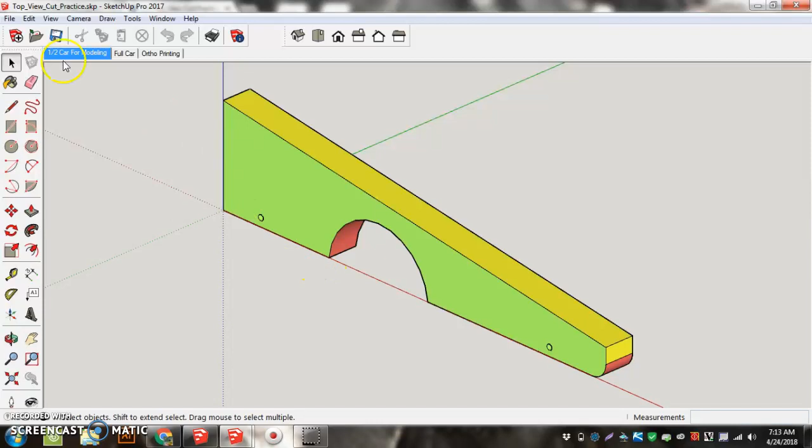So this file here is the top view cut practice file. I downloaded it from Schoology, and we want to do a top view cut practice on this one rather than on our main one, just because top view cuts are a little bit more difficult than what we've been doing so far. So we still have all the same stuff on the top here. Half car for modeling is the main one that we want to look at.

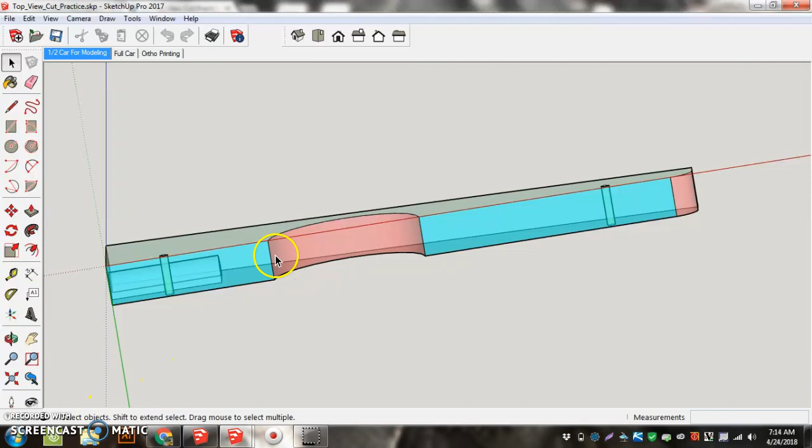And I'm looking at the bottom of my car here. So again, on top view, you can't touch the cartridge hole, you can't touch the axle holes on the outside of the car. You can, however, cut on the inside. So if this is how you'd make a forked car, this is how you're going to cut the side of the car in, this is how you're going to round the front of the car off. So I'll do a little bit of each of that to show you and explain what's going on there. So the first thing we have to do is edit this component.

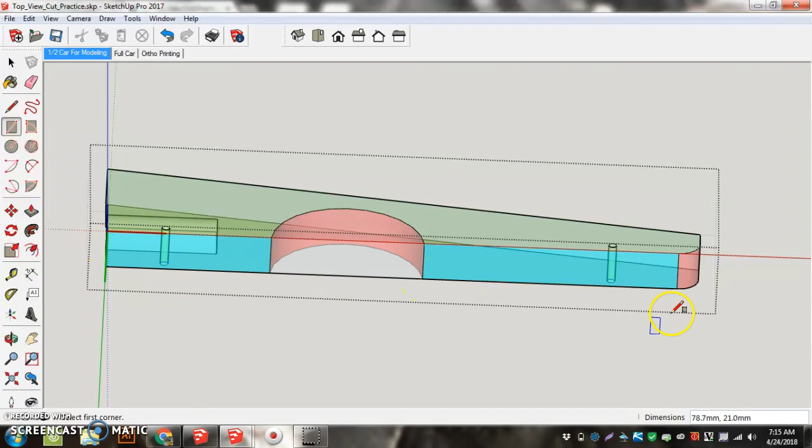So we're going to right click and go edit component. And we got the gray box, so we're working with the component. Now when I'm working on the bottom of a car, I need it to be flat. So to get it back to flat, we have to create a surface here. So I'm going to take the rectangle tool and go across this bottom surface. I can go right over this gap, or I could do the whole surface. Either way works. But now I have that flat.

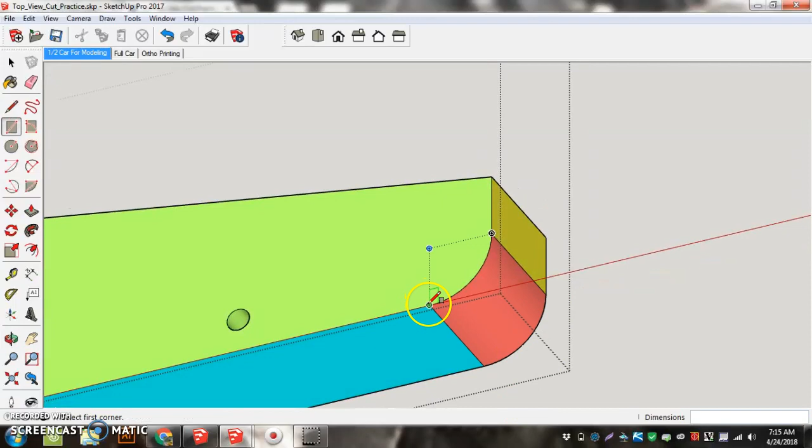I'm going to change that to view and face style and uncheck X-ray. So you can kind of see that filled in there. This front one here is a little bit different because we don't have a surface to go off of here. So what I'm going to do is my rectangle going across here, and then push-pull this surface back on. So now I have that flat on the front as well. So now we've got the whole bottom flat. We'll work on cutting that back out in a minute.

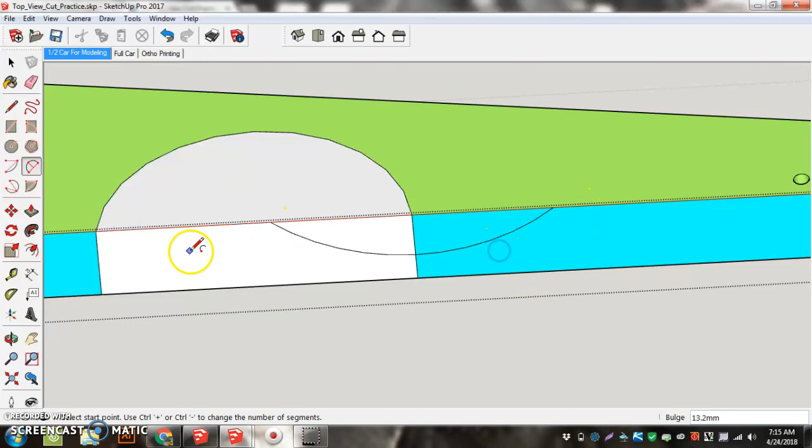Let's say I want to do an arc here on the bottom, here, here, here. And if we remember aerodynamics, we want to round these corners off a little bit. I'm going to start my arc coming back, so that kind of smooths that out. I always like to come back to about here. You can kind of see these groupings.

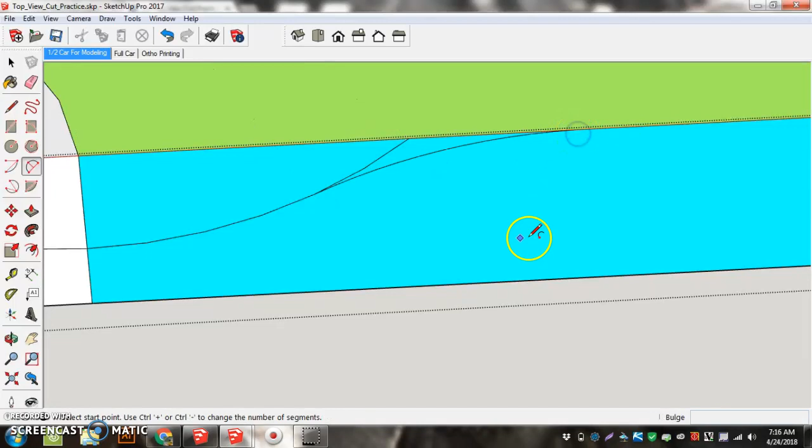This one's kind of hard to see because it's blue on blue. Clear that out, clear that out. Ooh, too much. Undo it with a Control Z and clear that out. So now I have that cut made.

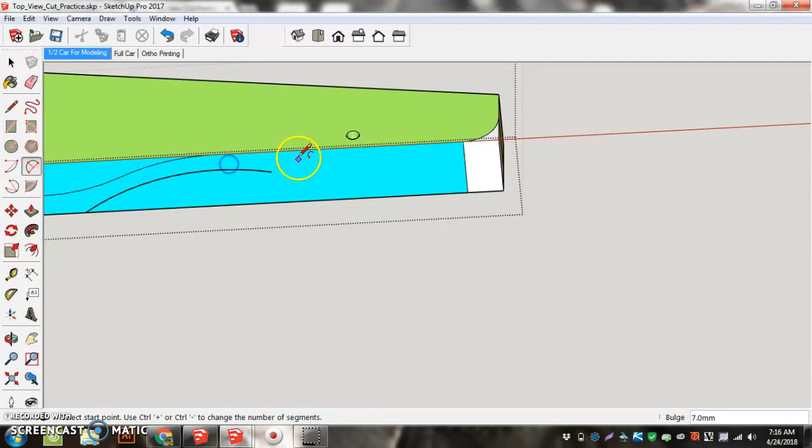My next cut I'm going to do is make an area in the front here. Thin that out. And I'm going to start about here. That thickens that up. So if I think about that, if I go to full car and look back at the bottom, I've now thinned it out on one side.

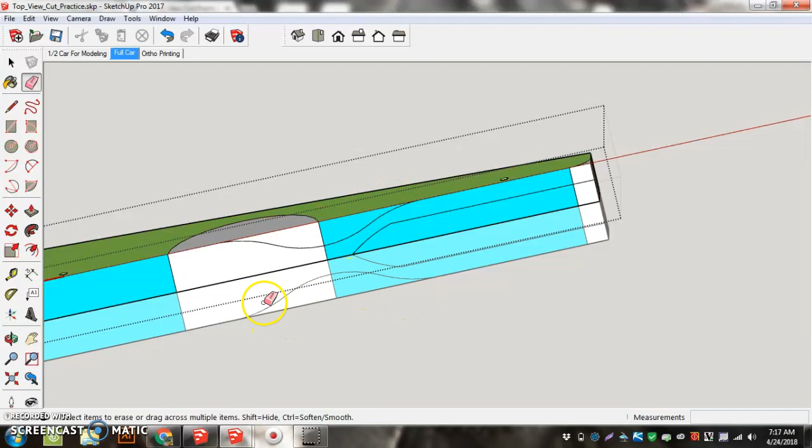I didn't have to do anything on the inside to thin it out on the side here. That automatically thinned it on the other side, and now I'm cutting a groove in there. Sometimes it's helpful to go back to full car at that point. And then on the front here, I'm just going to add a little arc to it.

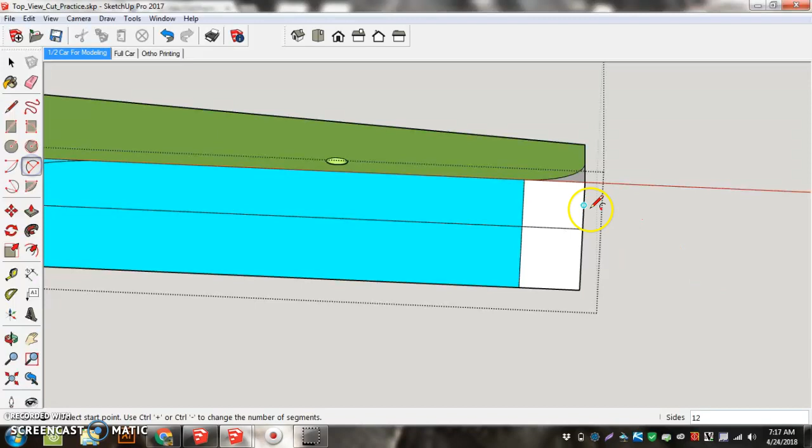So you can be creative with this. Take out what you need, what you don't need, all that stuff.

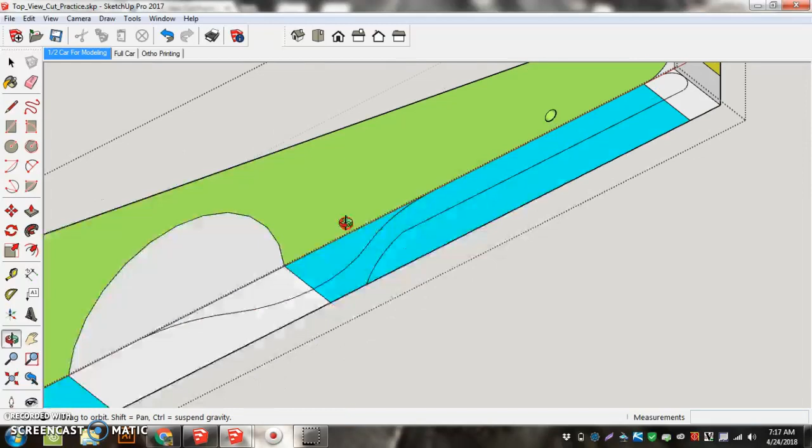Now comes the actual time of cutting. I'm going to use the select tool, the push-pull tool, and push-pull this surface up, and it's going to start doing what I want it to do.

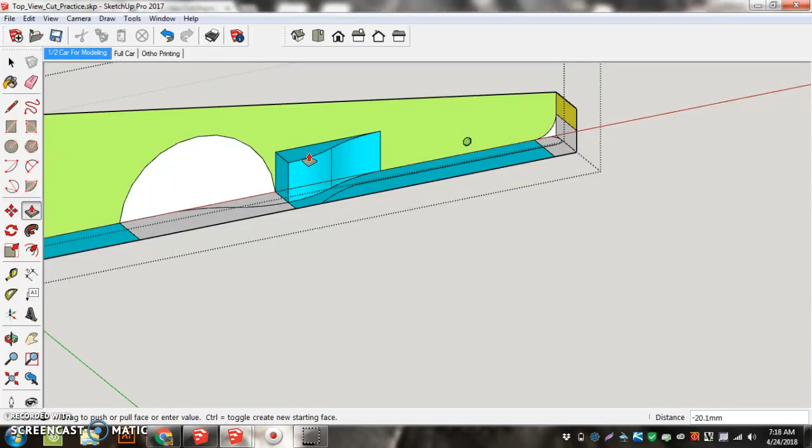It's looking nice, but then it hits this little spot here and it doesn't know what you want it to do. So this is where we have to tap the Control key, or Option key if you're on a Mac, and push-pull that all the way up.

So I have to be up and above. It's not looking quite right yet, but basically what we're doing is making a big chunk of material that we're going to use to cut. Tap the Control key again so I can get this to come up, and I just want to be up above here.

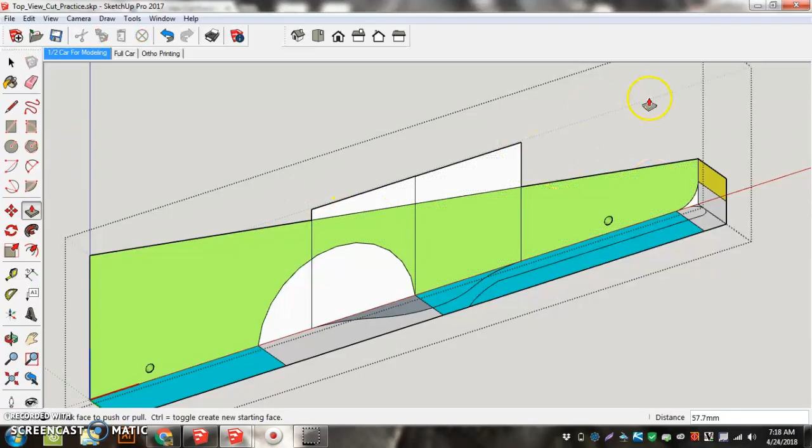So now I have this selected. You'll notice there's no line right here at this point. That's because this surface and this surface are just running into each other. They're not actually cutting each other, so what we have to do is make them cut.

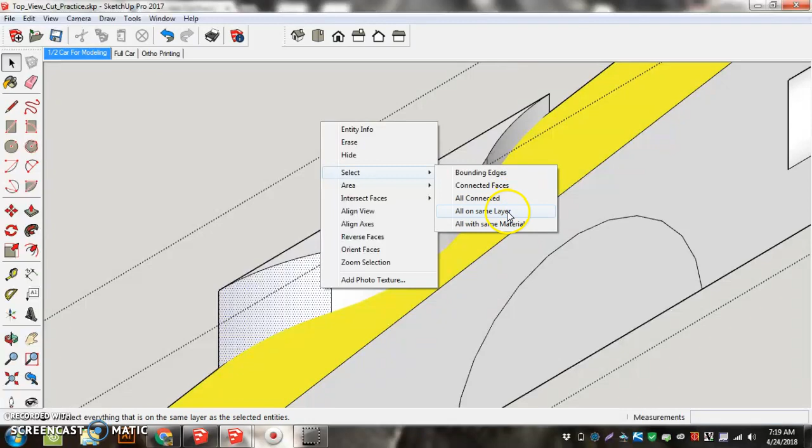I'm going to right click on it and go select all on same layer, so it selects everything here. That was a right click, select all on same layer. Now if I look here, I have them both selected.

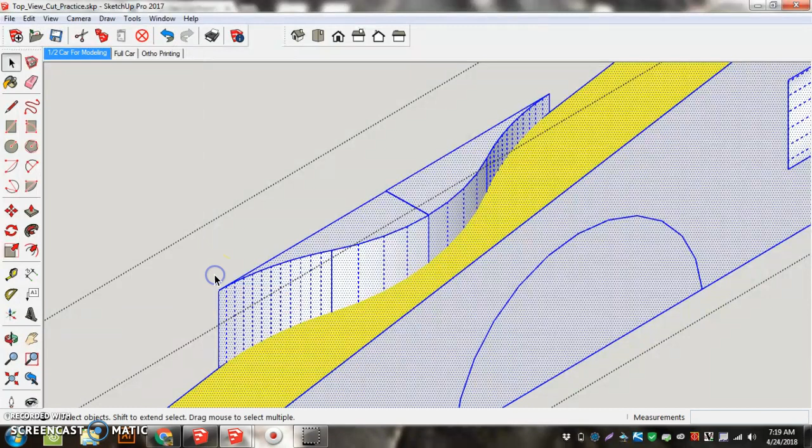Now I'm going to go to Edit, Intersect Faces with Model, and you'll see it made this line here. So it made those two surfaces cut each other.

Now I'm going to go to Front View. Using a window, if I drag a window this way, you'll see it's solid. If I drag a window to the left, it's dotted. Dotted means anything it touches, solid means anything that's completely inside the window.

Right now, if I go solid window over here, I don't have any lines completely inside the window, so nothing gets selected. If I go a little further, this line right here will be fully inside the window, so that'll be selected. If I come back this way, anything this window touches, including these vertical lines, will get selected. So I'm going to select back that way.

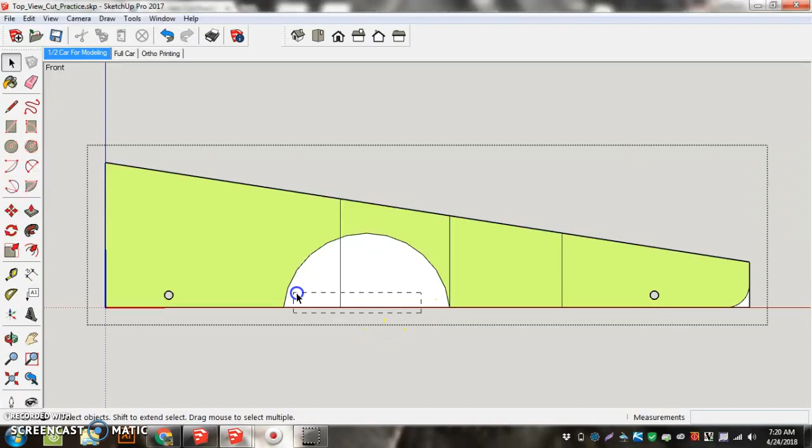Right click and erase, or you can hit the delete button. Again, going from right to left, I don't want to touch anything up here because everything gets selected then. I just want to touch what's below that line. Erase.

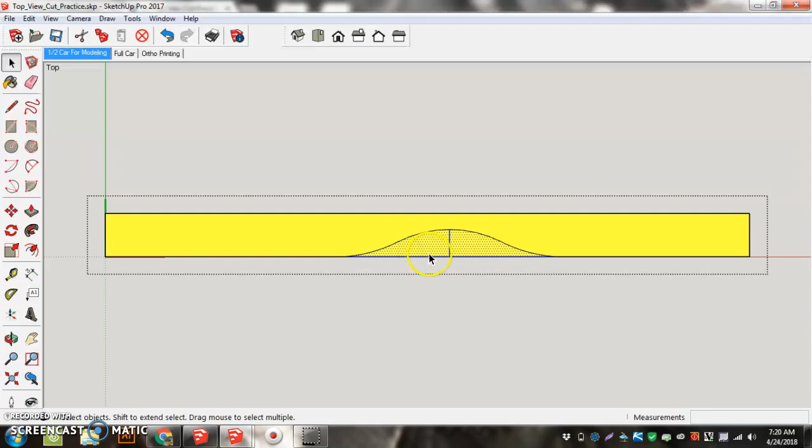Then I'm going to go to Top View, and this line is the line I want to keep, this curvy line. Right click, erase. And now I have the shape that I'm starting to go for.

I like what it's turning out to be.

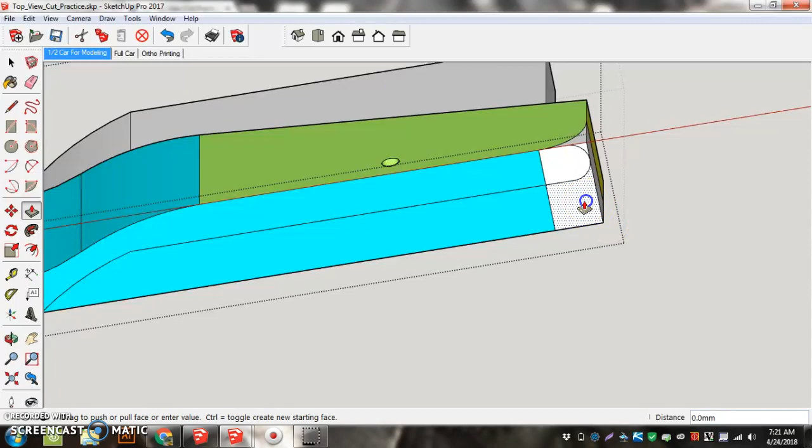I'll do the same thing over here. Push-pull, if you remember, tap the Option key or the Control key on Windows. Pull that one up. Pull that one up.

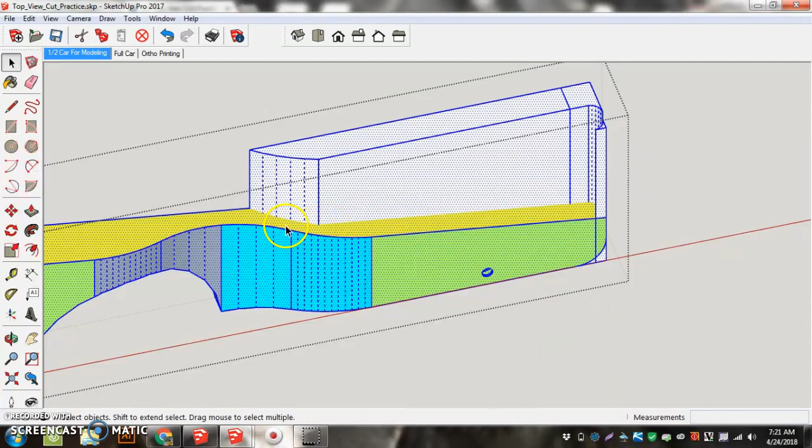Now they're not cutting, so we need to use the Select tool. Right-click, select all on same layer. Edit, Intersect Faces with Model. You can also do a right-click, Intersect Faces with Model. So I made them cut.

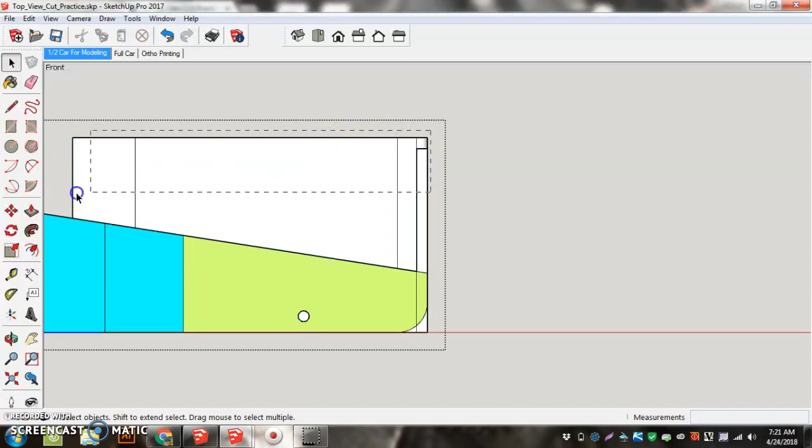Back to erasing. Front View, window from right to left, delete what I don't need there. Window from right to left over here, delete. So now I got back to my original shape.

Then we go to Top View. I know this is the shape I want. Delete. And delete.

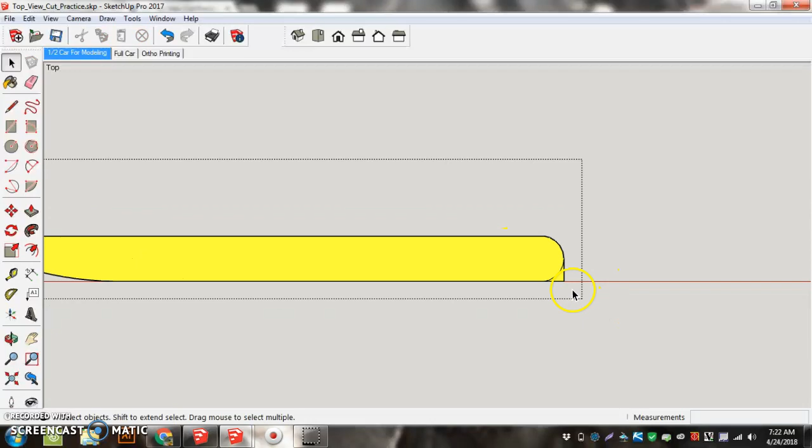So now I have a nice looking car.